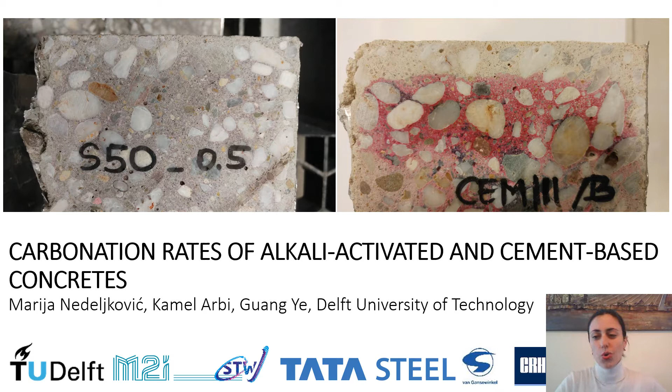To give a brief outline of the presentation, I will say something about the background, the materials and methods, some results, and the conclusions.

The differences, first of all, between cement and alkali activated concrete are mainly in the binder type that is used, and geopolymer concrete does not use any cement.

The reason why we are studying alkali activated materials so much in general is that it gives so much potential for reuse of secondary resources, and there are no standards, no guidelines for how we can actually implement these materials in practice.

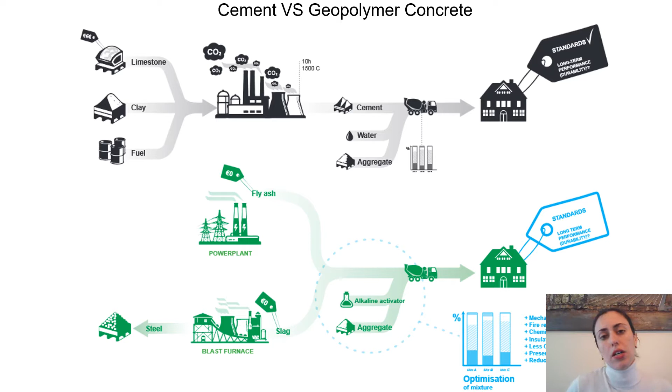In this presentation, I will mainly talk about carbonation in terms of service life performance. There are two main degradation mechanisms when it comes to the end of the service life of concrete, and those are carbonation and chloride ingress.

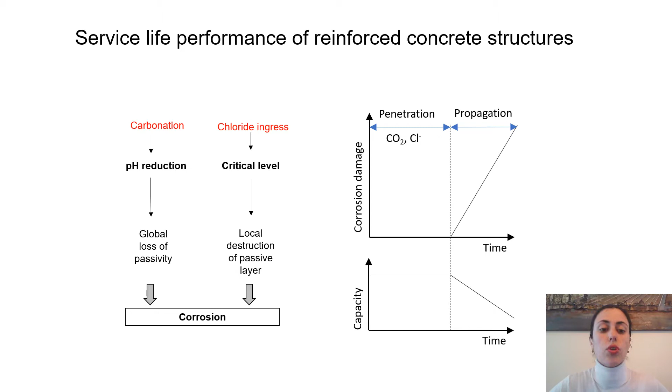We are interested today only in carbonation, and as you can see, carbonation mainly leads to pH reduction and to the global loss of passivity of the steel reinforcement in concrete.

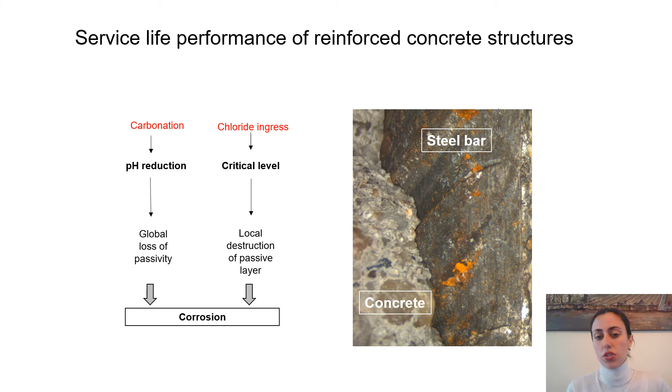However, is this the case also in alkali activated concrete? This is what is known for cement-based concrete. So I will present strength development of alkali activated concrete compared to cement concrete.

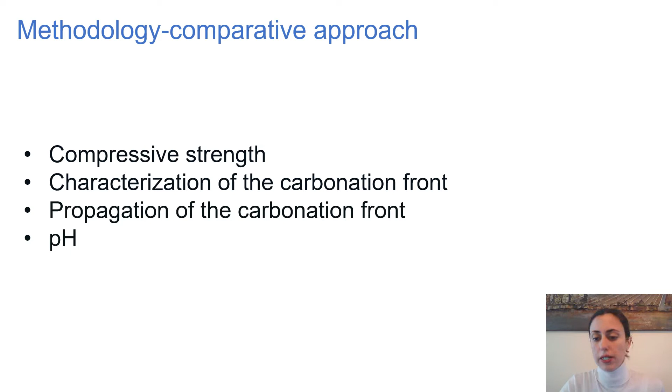Then some results on characterization of the carbonation front propagation, and the pH of these concretes when they are carbonated. In the mixture proportions, we can see there are four concrete mixtures.

Each of them has an amount of binder of 400 kilos per cubic meter. The aggregate distribution and amounts were the same for all mixtures, and also the liquid to binder ratios were 0.5, with the exception of mix 2 S50, where it was 0.6.

In exposure conditions, there were three types studied: accelerated carbonation, natural indoor, and natural outdoor. For these, the conditions are specified in the table below and also in the paper.

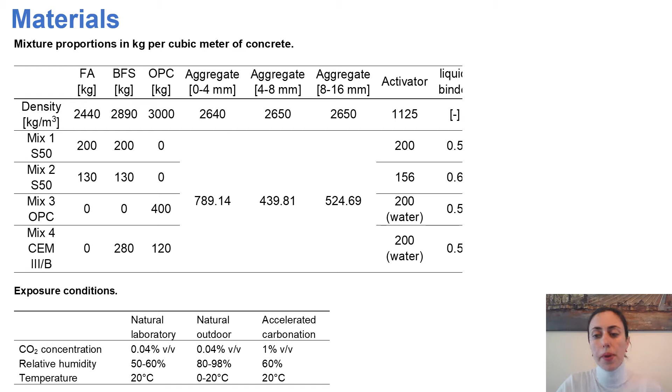So now, when it comes to results, what we first can see here is that the strength is studied for a period of 548 days, and as you can see, the strength is developing also after 28 days.

Now I will point as well: here we had curing prior to carbonation for 28 days, then preconditioning, and then we had exposure to carbonation from day 56.

The strength of alkali activated concrete in this study is higher, and you can see how much here. Why is that? Once we basically look, 7 days of alkali activated concrete corresponds to 28 days of the cement-based concrete.

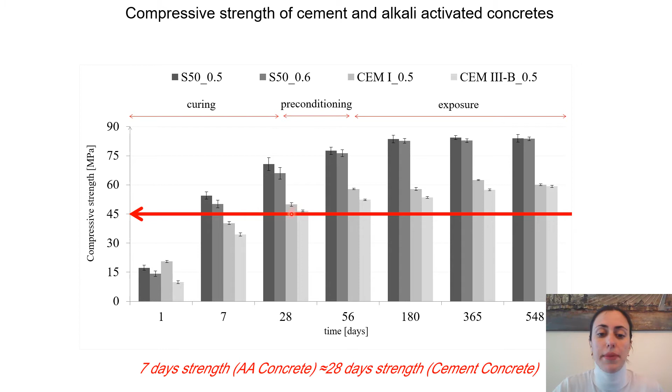Namely, the microstructure differences are very important for these two types of concrete. For alkali activated slag, for instance, the microstructure is so well developed, or let's say so dense at 28 days, while in OPC, or ordinary Portland cement paste, there are still so many porous spaces where the cement hydration is still continuing.

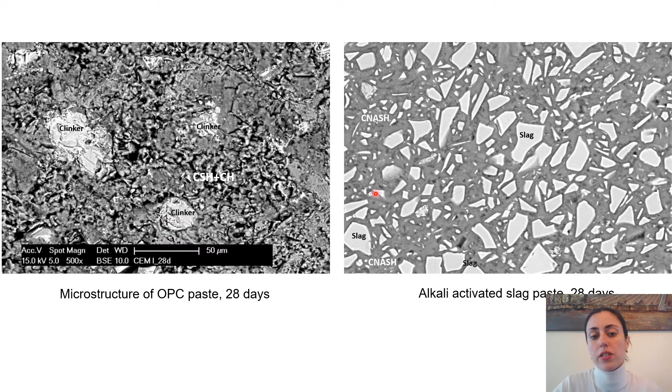When it comes to carbonation evaluation, as you can see, there were 5 samples. I added also one on a fiber reinforced geopolymer concrete.

As you can see, this was before spraying with phenolphthalein—the second row—and the third one is after spraying the phenolphthalein.

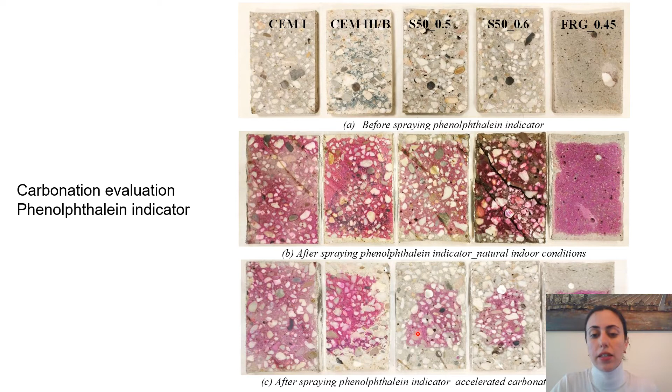The phenolphthalein indicator is not the best indicator for the carbonation front in alkali activated materials. Because of that, you can see here the front is basically very close to the border, while after spraying the phenolphthalein, that border moves much lower.

Because of that, we also investigated the carbonation front with microscopy. Under cross-polarized light, we could observe the zone, or the front, between the carbonated part and the non-carbonated part.

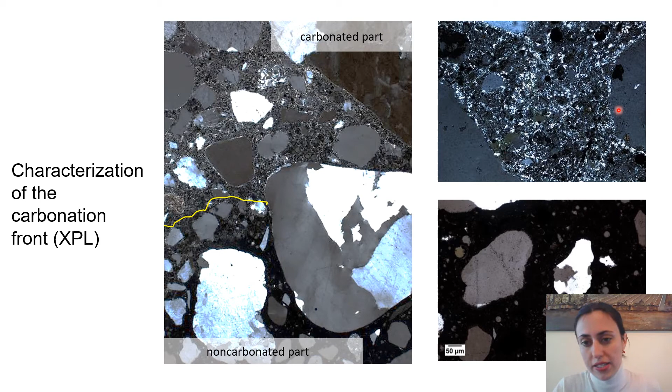As you can see, in the non-carbonated area, the microstructure is black because it's amorphous, while in the carbonated area, the microstructure is full of light small calcium carbonates.

Further, the propagation of the carbonation front for this period of 548 days: what we can see is that in laboratory conditions, the rate is similar indoor or outdoor, compared to the accelerated carbonation at 1% CO2. In a mixture of S50 0.6, it propagates up to 35 millimeters, compared to 5 millimeters in ordinary Portland cement.

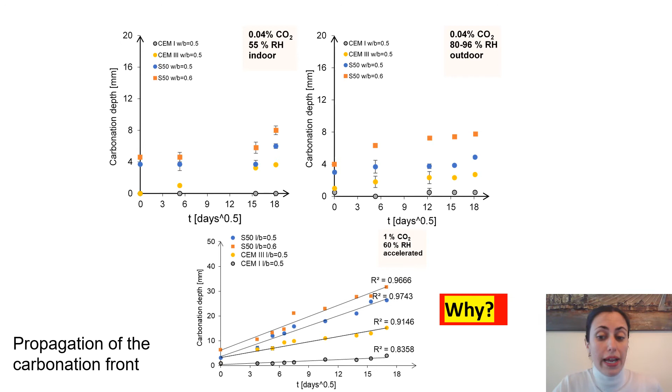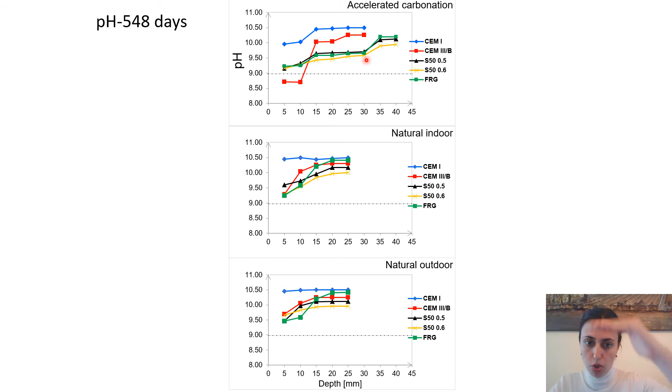So why? Of course, the question is why. We know that carbonation mainly induces a drop of alkalinity in the pore water of the concrete. Here you can see for the accelerated carbonation, once we had the carbonated layer of 35 millimeters, the pH was evaluated basically every 5 millimeters from the top surface, by grinding and dissolving it and then testing the alkalinity.

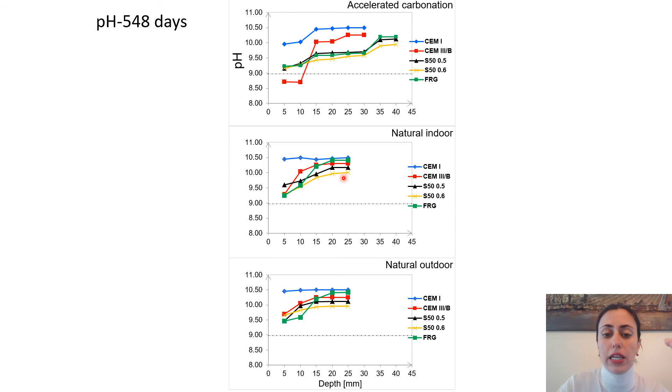We can see that on the very top surface, the lowest alkalinity is actually in alkali activated concrete, whereas for cement 1, it's higher, while for cement 3B it's even lower than for alkali activated concrete. When we look at natural indoor and natural outdoor, they all are above pH 9, and it slowly drops and stays high in the really inner part of the concrete. So there are two main reactions happening when alkali activated concrete carbonates.

First of all, the carbonation of the pore water with all the alkalis inside together with CO2 molecules, where we have formation of sodium bicarbonates or sodium carbonates. Then we also have formation of calcium carbonates if there is, of course, a source of calcium oxide in the matrix.

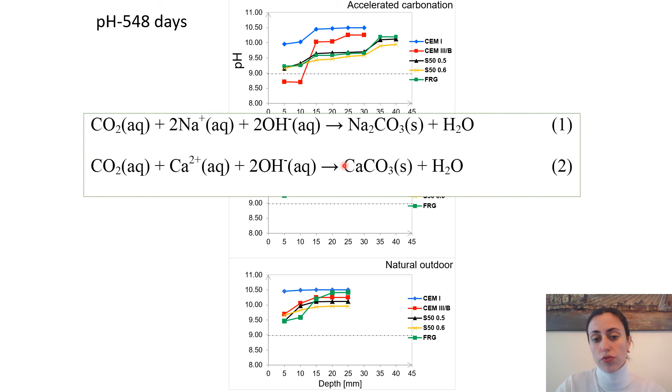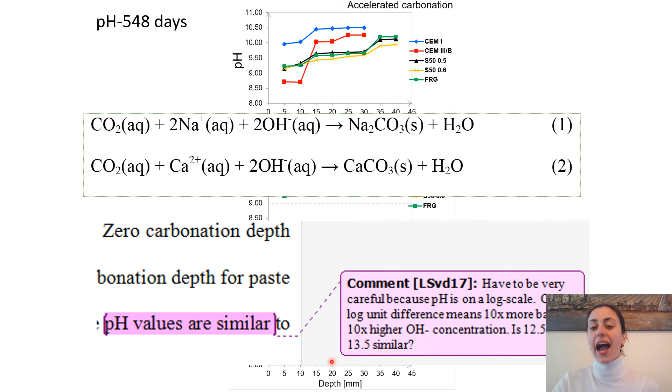We should also note that on these graphs, the pH is presented on a logarithmic scale. So there is a huge difference, let's say, between 9 and 10, or 12.5 and 13.5, as pointed out here, because that means 10 times higher OH minus concentration.

And then to go further to explain, although the compressive strength of alkali activated materials is so high at 28 days and the microstructure is so dense compared to CEM1 concrete and CEM3B, and even the porosity is consequently also much lower compared to the porosity of CEM1 and CEM3B.

The calcium hydroxide makes a huge difference, and also the amount of calcium oxide inside the matrix of CEM1 and CEM3B. That consequently means the CO2 binding capacity is much higher for CEM1 and CEM3B. So it takes a longer time to carbonate the available calcium oxide, while for alkali activated materials, since they have a low calcium oxide content, the CO2 binding capacity is lower, and carbonation can propagate faster.

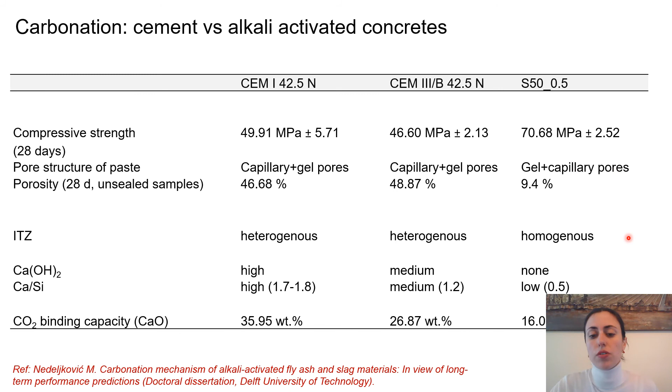More details about this you can find in my PhD thesis. So the main consequences of carbonation between cement and alkali activated concrete are a drop of pH and a change of the pore structure, which actually occurs for alkali activated concrete much faster because it has a lower calcium oxide content.

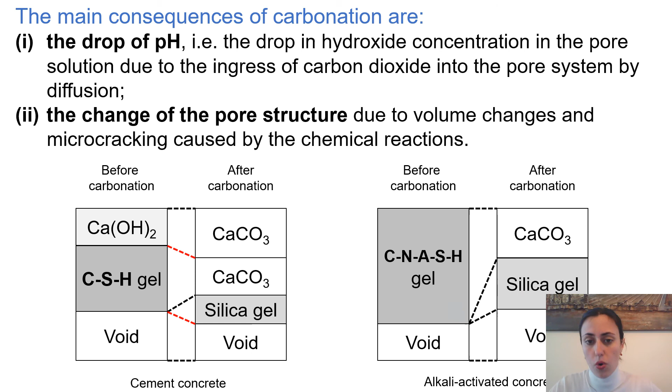Some guidelines for preliminary design for concrete where it would be exposed to carbonation: it is very important to use raw materials which have a high amount of calcium oxide in their composition. This really offers increased carbonation resistance.

And for the alkaline activator, it's very important in the mix design that the sodium oxide is balanced, so that eventual leaching from the surface of alkali activated concrete during curing does not happen.

Curing methods: curing at lower relative humidity than 80% would hinder alkali loss, or leaching from the alkali activated concrete. So a curing compound is absolutely necessary. Curing at higher relative humidity inevitably leads to alkali loss. This is also something you can see in detail in my thesis.

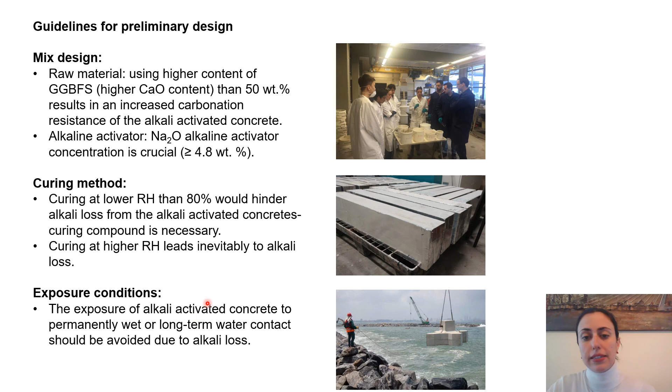Regarding exposure conditions, exposure of alkali activated concrete to permanently wet or long-term water contact should be avoided due to potential alkali loss, unless the mix is so well designed that alkali loss is avoided. Thank you for your attention, and I will be very glad to answer your questions.